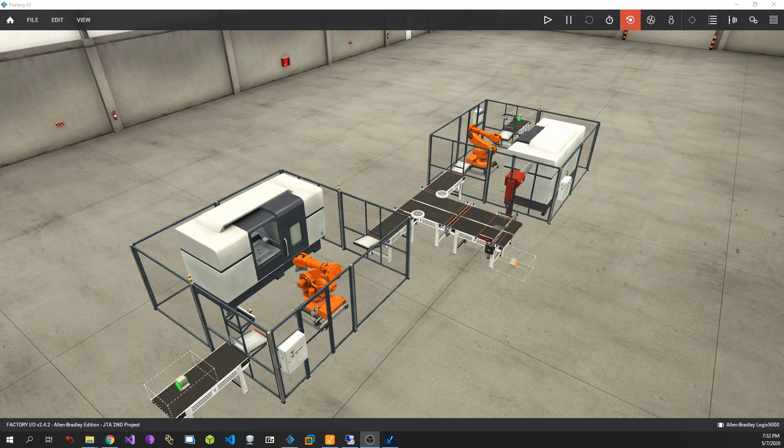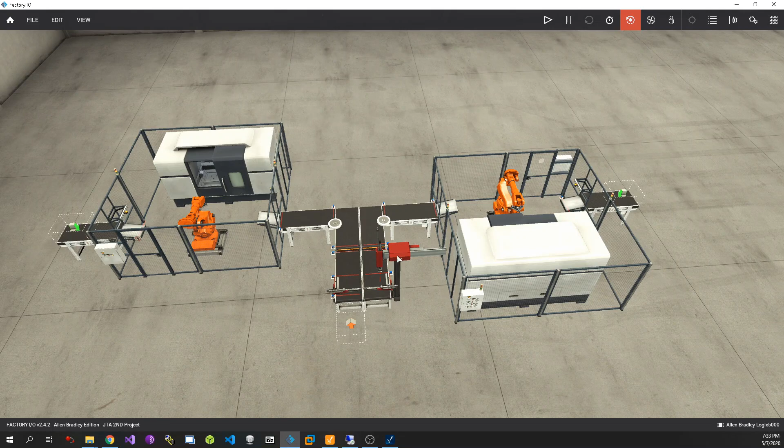I'm going to start off with the basic layout of my factory here. It's pretty simple. I've got a base machine and a lids machine station. Both of them are set up in relatively the same way. At each end there's a conveyor that feeds raw material into each one of the stations.

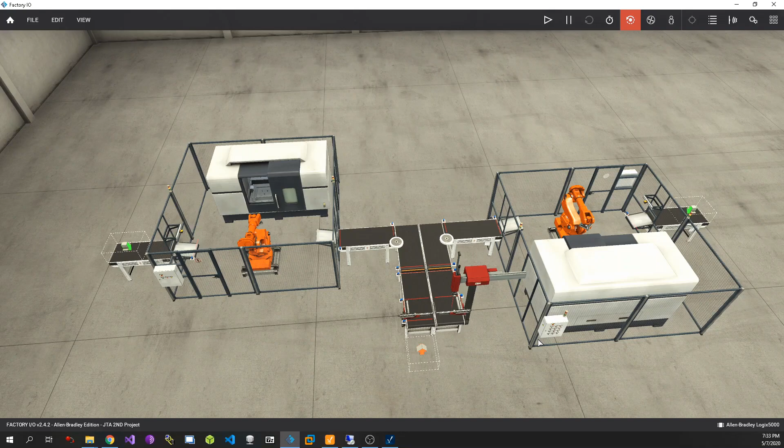It feeds in down the line, reaches these stop blades. Once both these stop blade sensors are met, it will feed into the assembler where the lids are conjoined to the bases and then off into non-existence.

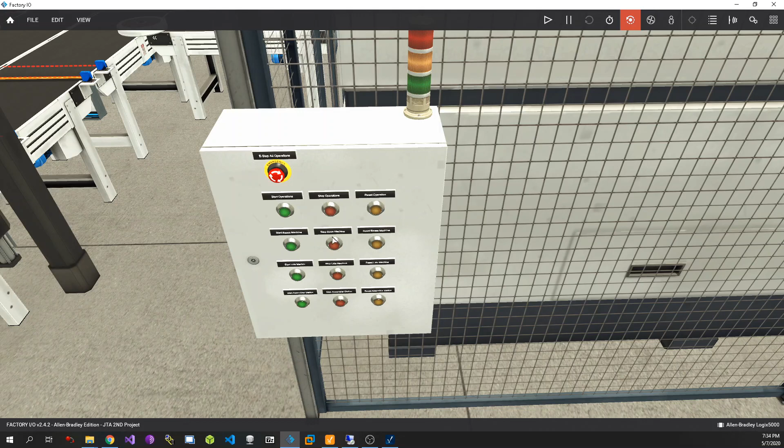Here is my main operations panel. The top one here is for starting or stopping all of the operations. Then down here for my base machine, my lids machine, and then the assembler. Right here is for letting me know if everything is ready, if it's stopped, or if there is an alarm present.

Here is my IO map. This is where I did a lot of my alarming, as well as my start-stop function and my heartbeat. Up top first here, of course, my heartbeat. Anytime that my heartbeat is not being read within a 5-second time parameter, it will trigger an alarm. I have this pseudo bit here to kind of make a pseudo communication failure.

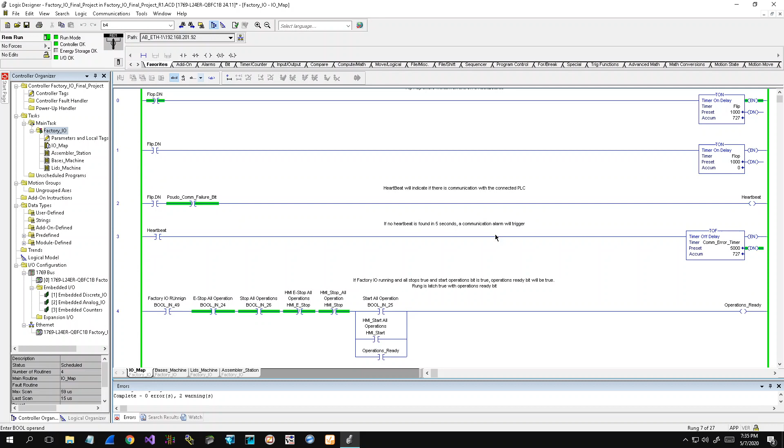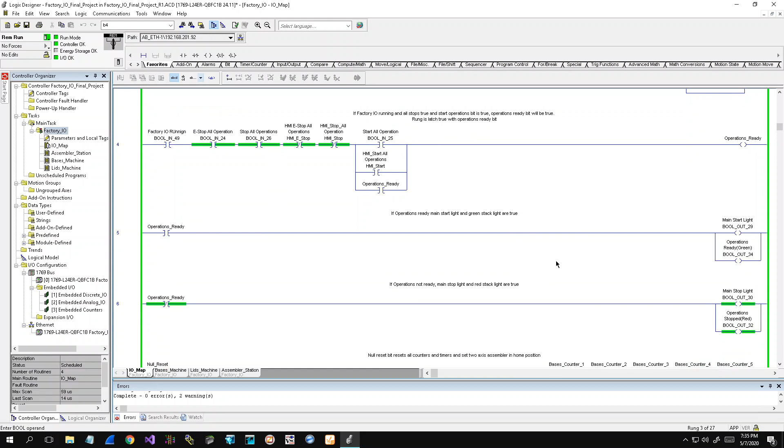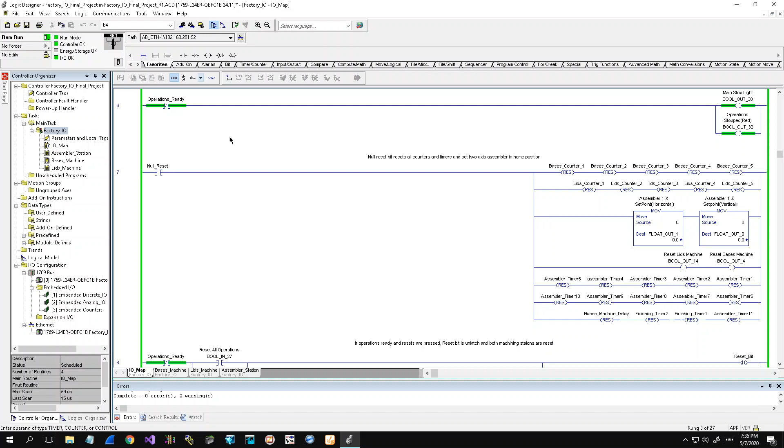And down here, this is for my start stop of my main operations buttons. Anytime the operation is ready, the main light is on. If not, the red light. This null reset here, this is for when I was programming and I didn't feel like starting FactoryIO over again and reconnecting and re-downloading my program. So I just set up all of these resets.

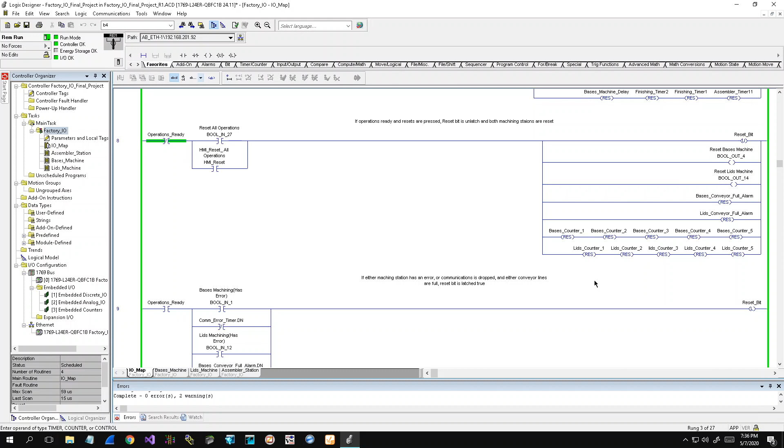This is my reset operation for if we have an alarm present. And then I can reset it here using this unlatch bit, and also resetting some of the timers and the counters that I have set up. These timers here are specifically meant for alarming. These counters are kind of for redundancy.

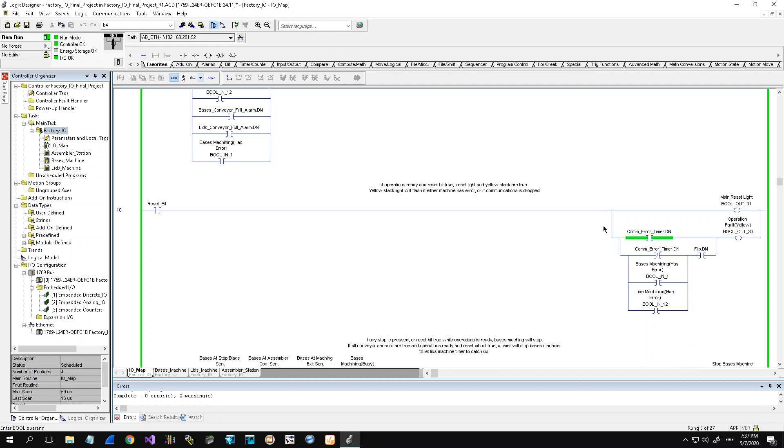And here is my actual alarming, where if base machine or lids machine has an error, or there's a comm failure, or any of the full alarms are tripped, it will latch in the reset bit. And if the reset bit is latched in, the main reset light will turn on. And if there's a comm error or any of the machines have errors, this yellow stack light will flash. If any of the conveyors are full, it'll stay on solid.

Down here is actually kind of a stopping protocol, I suppose, where if all of the base conveyor sensors are met, it'll stop the machine for a certain amount of time, which is 30 seconds here, and then it will restart it after that 30 seconds. That's kind of my catch-up protocol there, allowing the lids machine to catch up with the bases machine if all the conveyors are full.

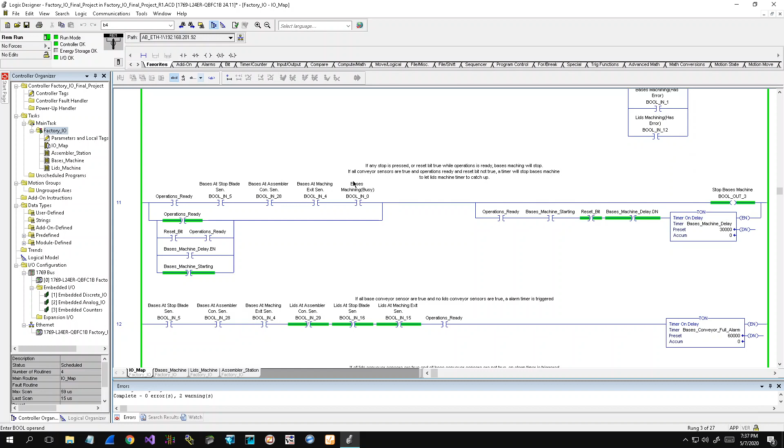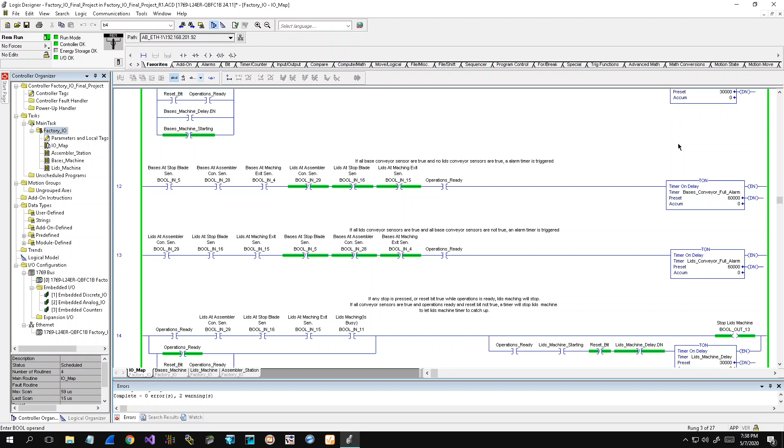If the conveyors are full on the base side and the lids conveyor has nothing going into it, then an alarm will trip, and that will be my base conveyor full alarm, and vice versa for the lids machine. And this is the alarming for the base conveyor and the lids conveyor full alarms, where if all these sensors are met and all the other sensors are not met while operation is running, it will trigger the alarm, and again vice versa for the lids.

And this is the same basic stop protocol as with the base machine. It's got a 30-second time delay in case the base machine needs time to catch up.

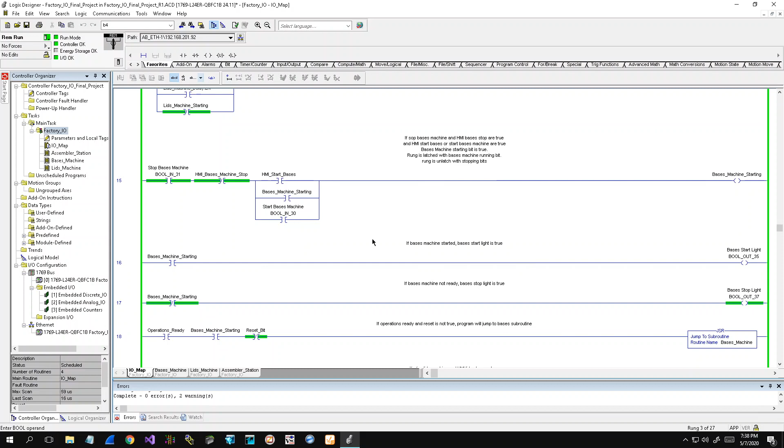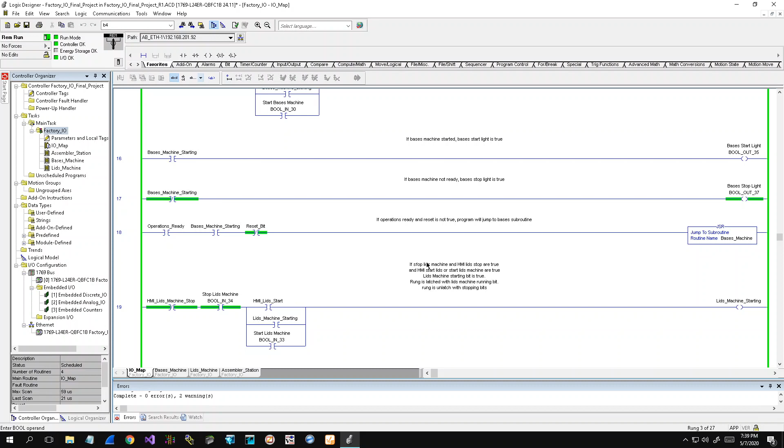And down here is my basic start-stop operation for the base machine. If the base machine is ready, base light will be on. If not, the stop light will be on. And if the base machine is ready and there are no alarms present, it'll jump to the base main logic. And this is also basically the same logic as with the other start operations.

Then once the lids machine is ready and there are no alarms, it'll also jump to its main routine. And the same goes for the assembler. Start, stop, if it's ready, light's green, if it's not, light's red, and then it'll jump to the assembler.

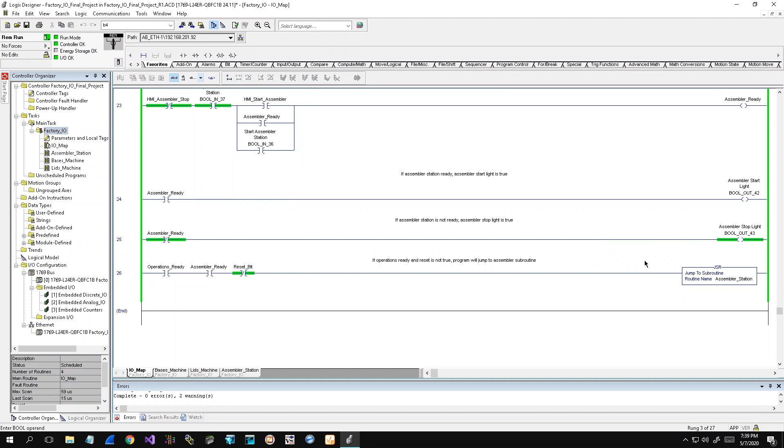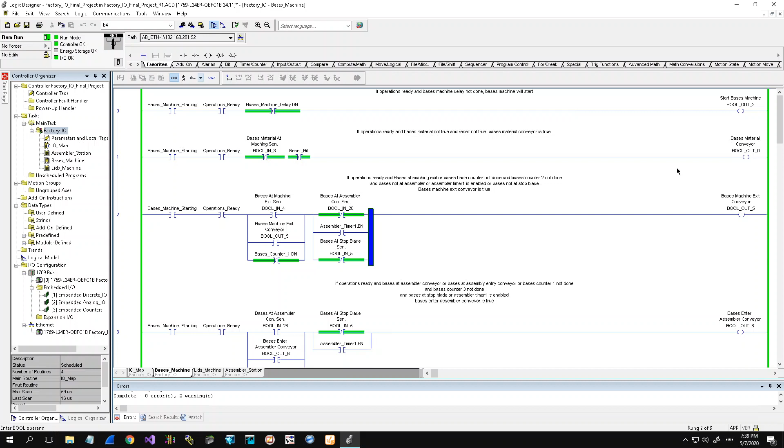And this is my main logic for my base machines. Base machine is ready and operations are ready, machine will start. If everything is ready and there's nothing met at the base material conveyor, the conveyor will start until that sensor is met.

How I have these next rungs set up is the base exit machine conveyor that's able to hold 2 products at a time, and it'll actually move one product from the exit conveyor onto the enter assembler conveyor, where at the enter assembler conveyor it'll wait until both the stop blade sensors are met, and then it'll flow into the actual assembly line.

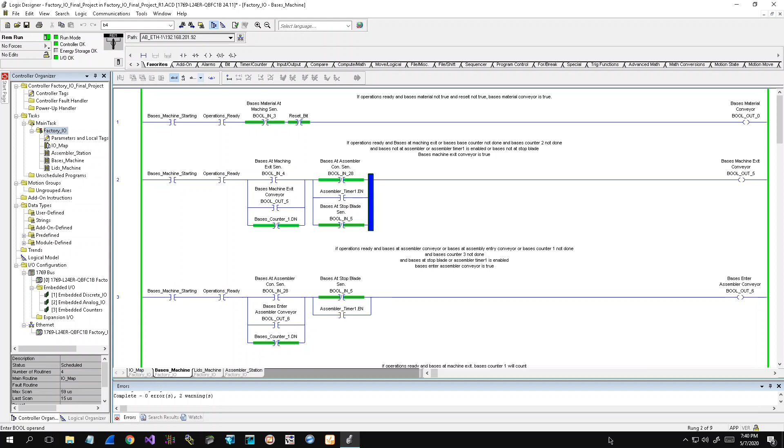And here are a lot of my counters. Originally I had them set up to turn on and off the conveyors. Now I'm using them as redundancy in case I have issues with FactoryIO turning things on when they shouldn't be, or keeping them on, or turning them off when they shouldn't have been turned off.

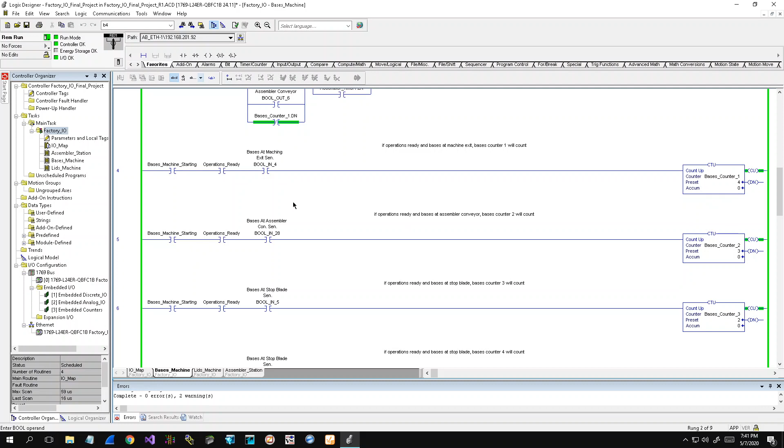And it's basically the same logic here with the lids machine. Again, the lids exit conveyor can hold up to 2. Once it holds 2, it'll stop running. The lids enter conveyor will only hold 1, and both the lids enter conveyor and the bases enter conveyor will start back up again if both the stop blade sensors are met and a timer is triggered, which that timer is this assembler timer 1.

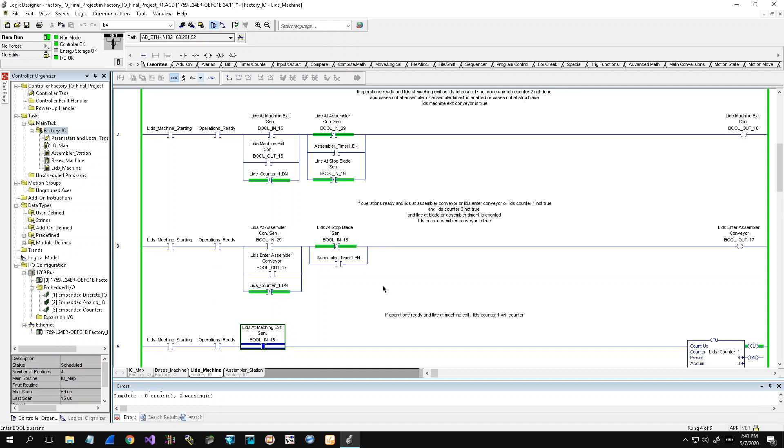And again, I have my counters down here, originally used for turning on and off conveyors and such, and now it's primarily just used for some redundancy. So here I have my main logic for my assembler. If both of the stop blade sensors are met, it'll trigger a timer here, which when the timer is enabled, it'll start those enter assembly conveyors back on. When it is not enabled, these stop blades will actually go down and let the product go onto the main assembly line.

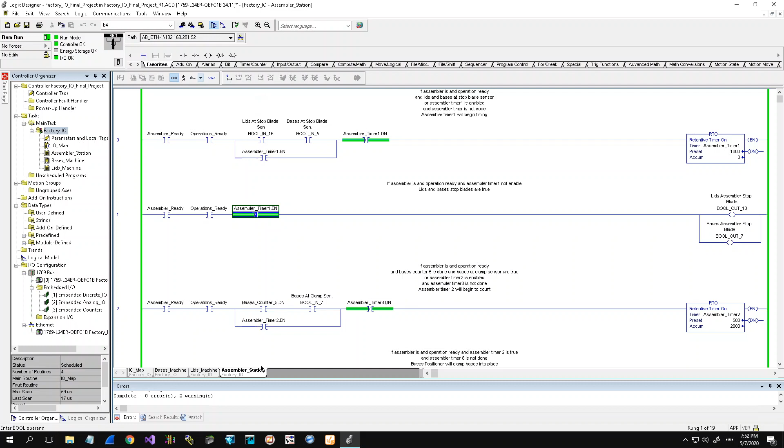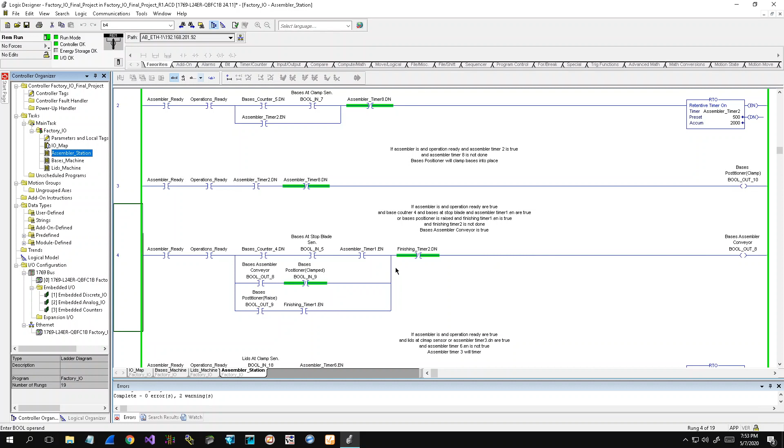And down a little bit further here, this rung will begin another timer if both these conditions are met. Base counter 5 is done and the clamp sensor is met, and that will actually initiate the clamping phase of the positioners. But the clamping can only be done after they've met the sensor and after a certain amount of time has been met, in this case half a second. It's giving the product enough time to actually meet the sensor and go down the conveyor enough to be clamped, where it's held in position and then later assembled.

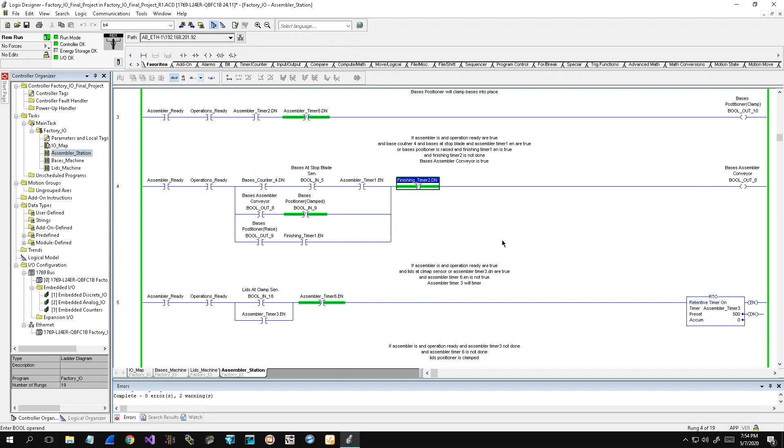This bit of rung here actually restarts the base assembler conveyor. This is actually where the finished product is, and these bits here will start the conveyor back up again and move the product down the line and removed. This logic here is for the lids. After the lid clamp sensor is met, it'll also give the lids enough time to reach the actual clamp to be clamped.

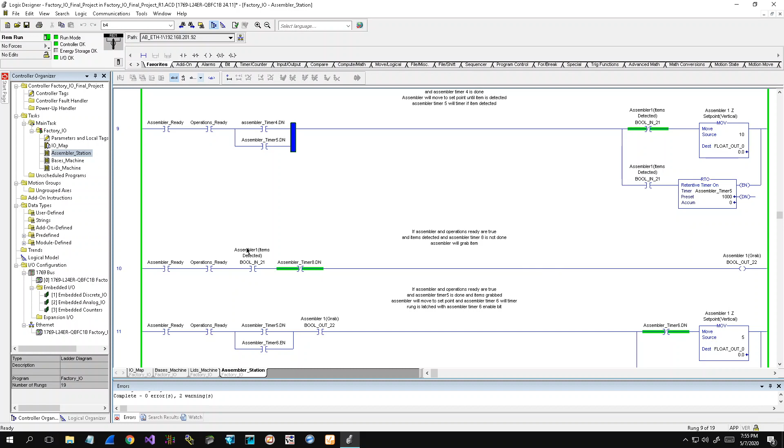And further down here, we have the actual assembly of the product, where when both of these positioners are clamped, another timer will get triggered, and it'll initiate the second phase, where the assembler will position itself over the lids, well, it's actually already positioned there, and it'll go down until the assembler detects the item. And once the item is detected, this timer will initiate and it'll start the grabbing phase.

And this timer here will actually initiate this rung here, as well as the done bit, or the grab bit, which will then move the assembler up just enough to make enough clearance to get over into the next conveyor line. And then this timer here is initiated, which will move the assembler over into the next conveyor to position itself over the bases, where this next timer initiates, and then it will move the product down onto the actual base. And this timer 8 here will actually disengage the grabbing phase, so it'll let go of the product so it doesn't bring it back up and throw it all over the place.

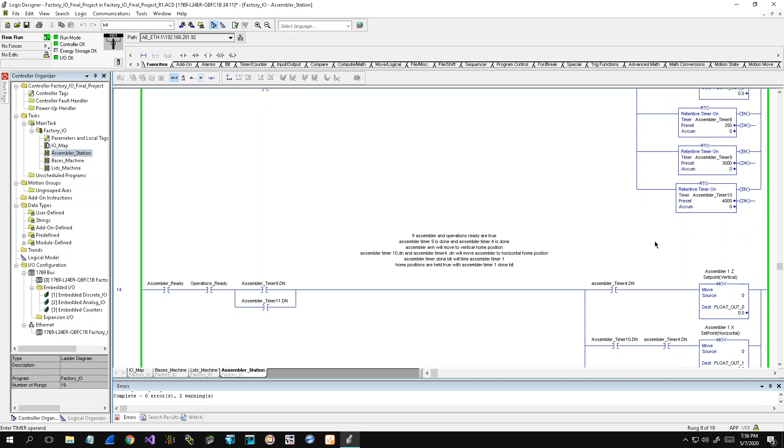And these two timers here will initiate the actual homing of the assembler. When this timer 9 is done, it will move the assembler back up into its vertical home position.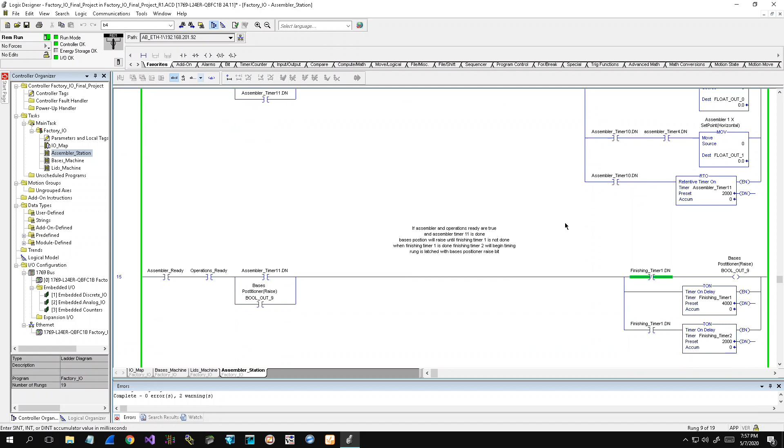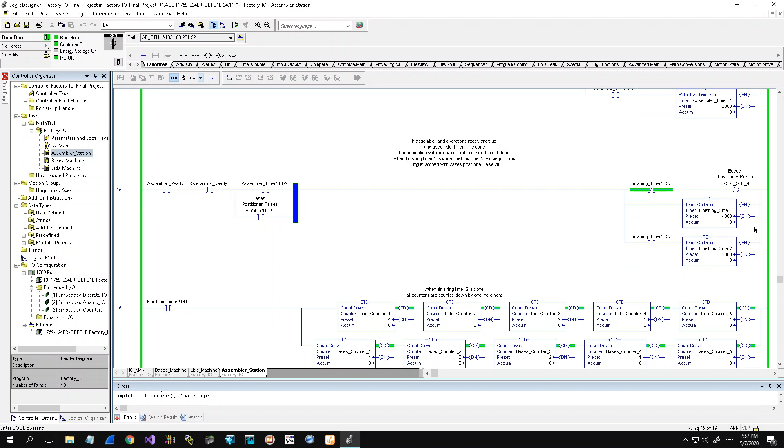When timer 10 is done, it'll move the arm back horizontally into its home position, completing the homing phase. When timer 10 is done, it'll start timer 11, where timer 11 will actually initiate some of the finishing phases, where it will raise the base positioner up, and then this will actually turn on the base's assembler conveyor with the finishing timer enable bit here, which will give it enough time to move the product out of the assembly line and into nothingness.

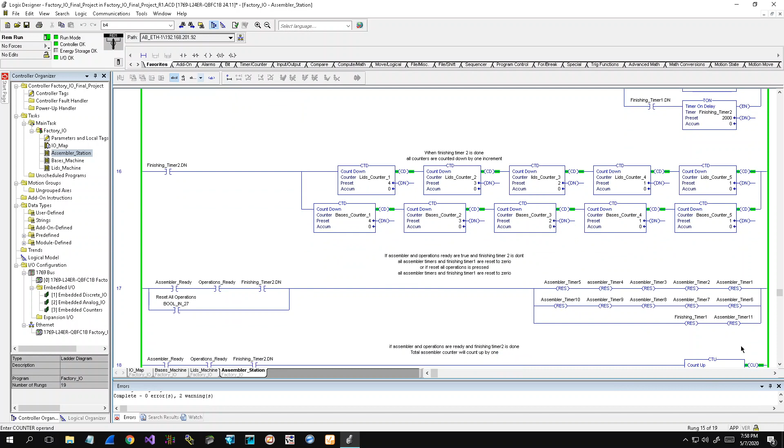This finishing timer is pretty much here for the sake of redundancy. It makes sure that these things are counting down properly. Sometimes the product wouldn't get conjoined properly, and the sensor would actually count too. So I put the timer there to count down the counters correctly, as well as to count up on the other count up. When everything is finished, it'll actually reset all of the timers, as well as the first finishing timer.

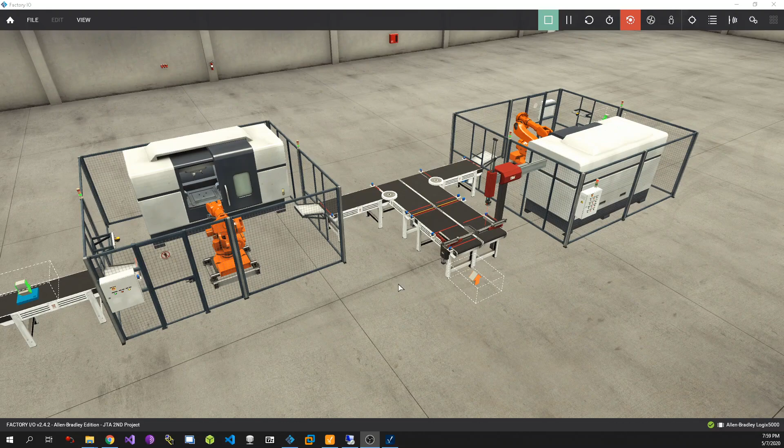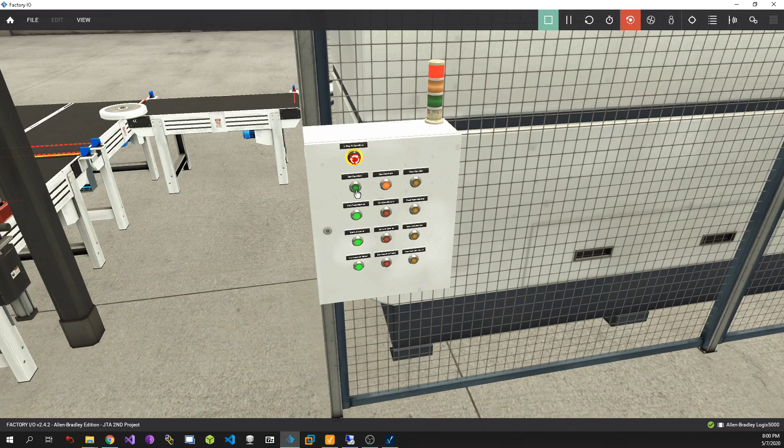With that, we can move on to the actual process of this whole factory. To get started, of course, we gotta start all the operations. You can start in any sort of way. I like to just get the machine started first, and then to start the actual operation itself, which will begin all of the phases. We got the material getting fed into the machines on both ends, which then gets machined into the actual CNC.

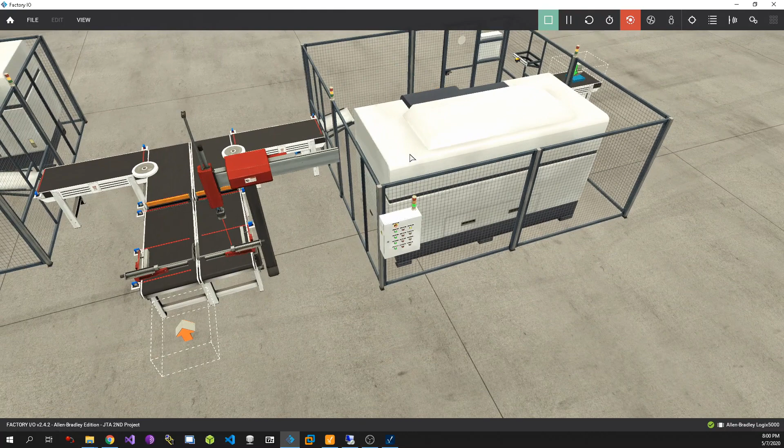Right now I'm going to show a COM failure, what that kind of looks like. And so once the COM failure has been initiated, everything stops. We got the base machine and this machine stopped. And as you can see, there's yellow over each one of the machining stations indicating that they're stopped. And then we've got the light here which indicates that there is, I suppose, a major fault.

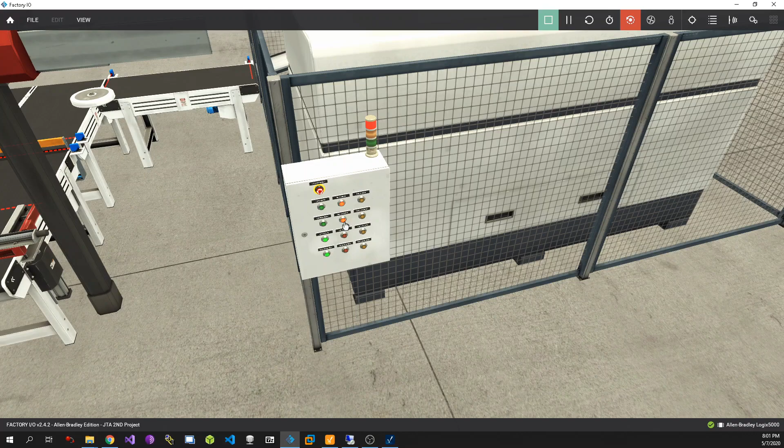In order to clear that out, we have to stop all of the operations. And then we have to reset all operations. And that'll start everything back up from the beginning. Now everything is back to the way it should be.

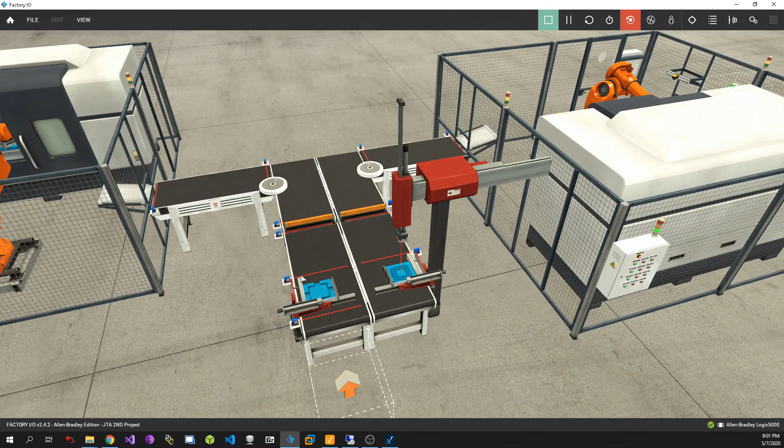And so now the lids are making their way to the stop blade sensors. And these are the clamp sensors. As you can see, they waited just a little bit before they actually clamped. And then they're actually getting assembled here. And this will raise, this conveyor turns back on, and then everything gets reset with that finishing timer.

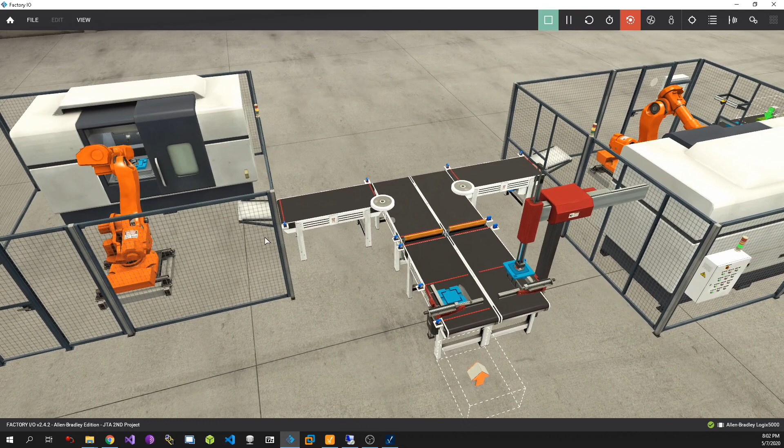Next, I will show a conveyor full alarm, which will actually take a bit considering how slow these take. So I will pause it and let one of these conveyors get filled up all the way. Now that one of the conveyors is almost full, it'll actually go into a stop phase where when these are full, this machine will actually stop because we don't want this thing to get overloaded for no reason.

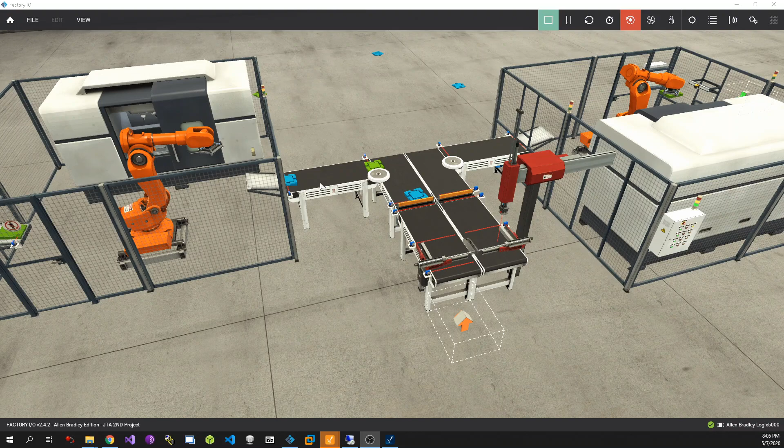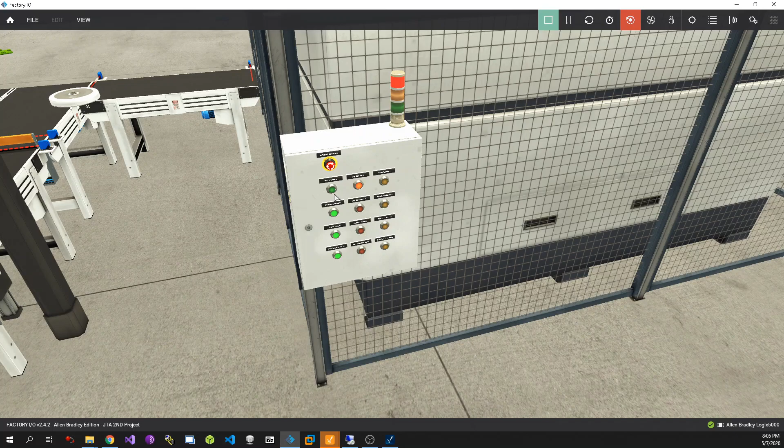So now that this conveyor is full all the way, I have another alarm present here. That's what this yellow indicates. It's not a major fault, that's why it's solid. So again, all we gotta do, shut everything off. Then we gotta reset it. And start over with this operation again. And there we go.

And since all these are still full, this machine isn't going to be doing anything, at least until this gets moved down here and there's enough room for some extra bases. I'll wait here a bit. And things are back the way they should be. And given that this is still stopped, it's actually got that 30 seconds it's got to wait yet, letting the lids machine catch up a little bit.

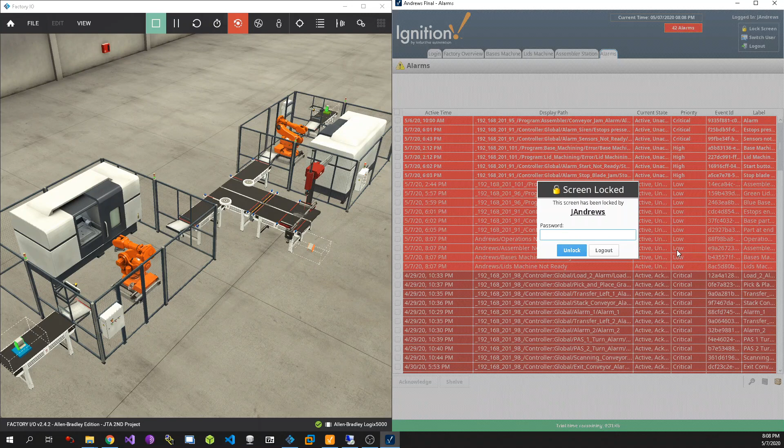So now that I've kind of demonstrated what it can do and some of the PLC alarms that it has, I can now show you the HMI and all the fun alarms that are set in that. So I have security set up in it where I am the administrator. I can do anything I want. I have two others, an operator and a guest. The operator can do anything that they want other than changing users and setting different alarms.

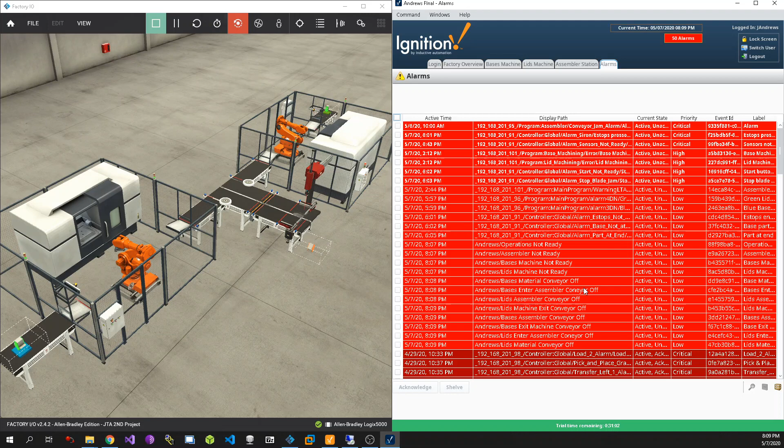So here are actually some of my alarms now. Operations aren't ready. None of the assemblers are ready. All the conveyors are off. And those are all active right now because there's nothing that is on. Go down a little bit further. There's some of the old errors, communication and all that. And it'll actually tell you if a reset is required.

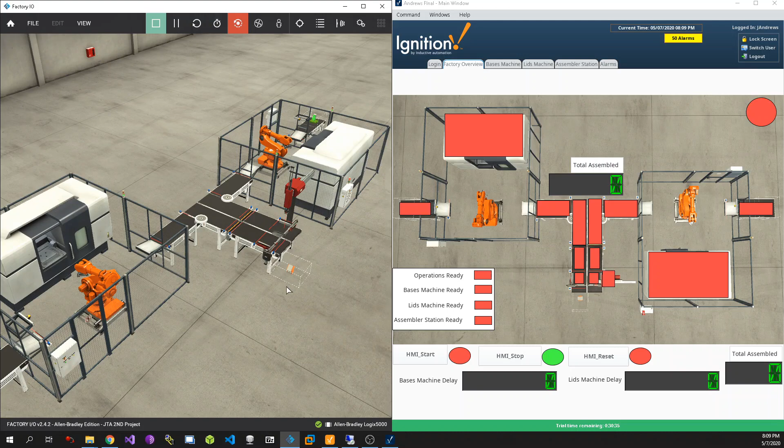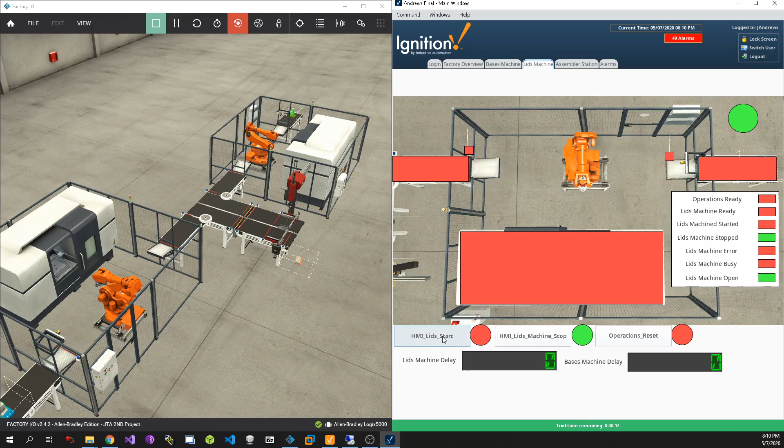So here is the factory overview of, well, of the factory. Here I got my start and my stop, my reset, and here's for the bases and the lids and the assembler station as well. So just like with the main panel, I like to start off with just starting all of the lids and base machines first. So now all of those things are ready. We can start the final operation. And there we go.

So these ones indicate that the conveyors are on and that the base and lids machine are ready, as well as the assembler here. The circle here is my heartbeat. If that goes away for too long, another alarm will trigger. So I will do that pseudo alarm trigger again, and we will see that alarm event in the HMI.

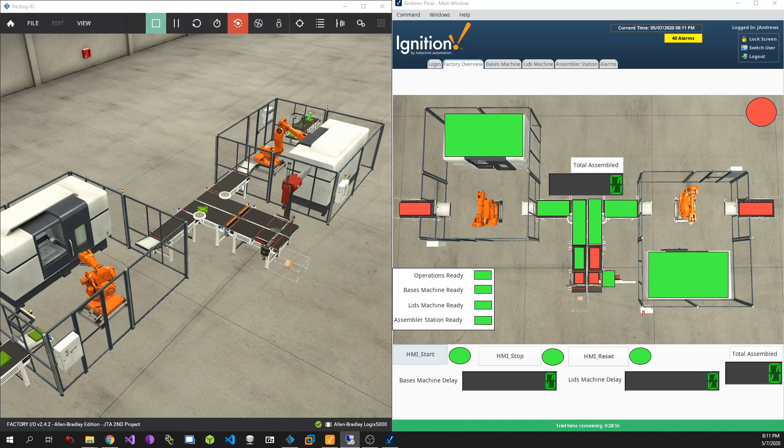Give it 5 seconds and stop. Machines have stopped. Though the conveyor should be off. That's just some weird Factory I/O thing. It just doesn't want to do anything. So as you can see, my heartbeat is gone. And so again, we gotta shut all of these machines off. And I actually use toggle buttons for these. So you actually gotta turn the start back off.

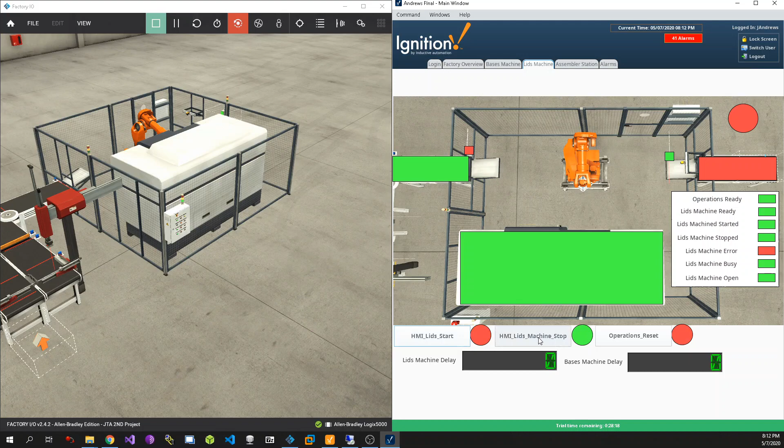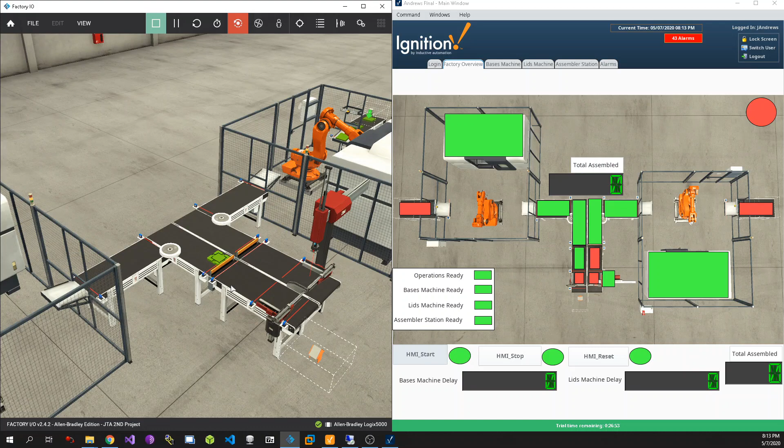And so with all the machines off, we can now reset it. Whoops, I'd have to turn that off. Yeah, so now we just reset it. And now we can go back in and turn everything back on. Base is on. And now we will start the operations over again. Well, we can't because the alarm is still present. So the alarm was still present because I forgot to turn my pseudo failure bit back on.

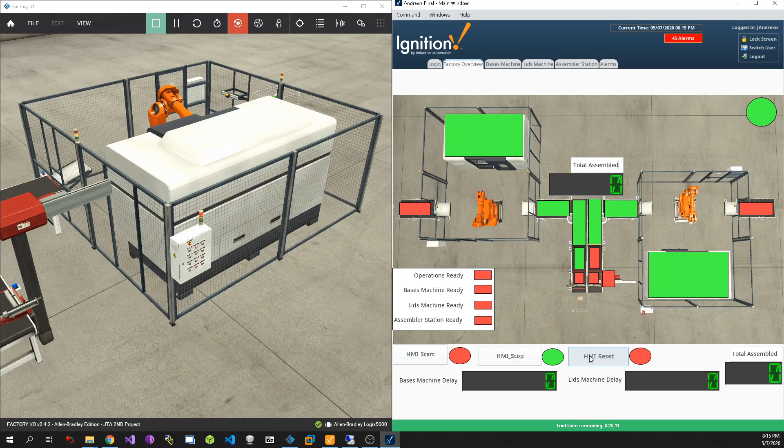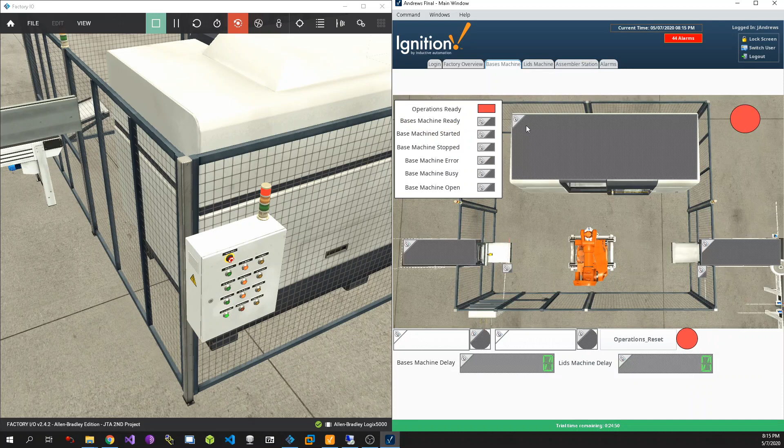So anyways, the HMI toggled the reset. You can see everything is off. The reset button's not on. Red light is on. Everything's off. Yellow light's off, so there is no alarm. Now we can go back, start up everything. Just look at that. Bases, the lids, now the overall factory. Everything starts back up from where it left off.

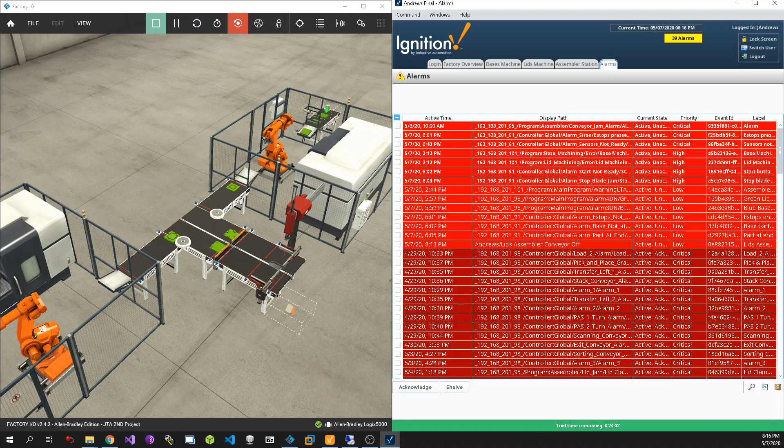Now we can go check out that alarm that used to be there. There it is, 807 communication error. And then here are the other alarms for system reset required, communication failure, and the assembler conveyor is off because that's kind of what we wanted. And so that pretty much does it for the actual project.

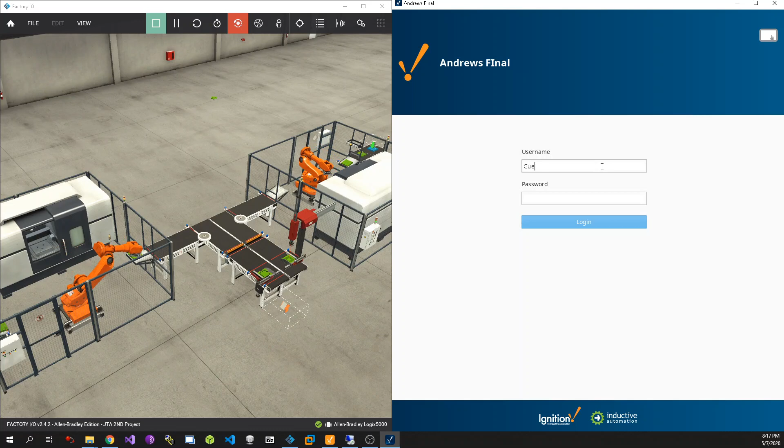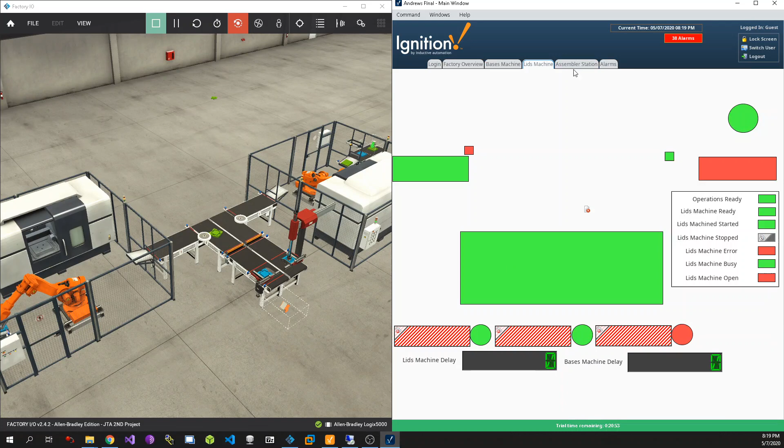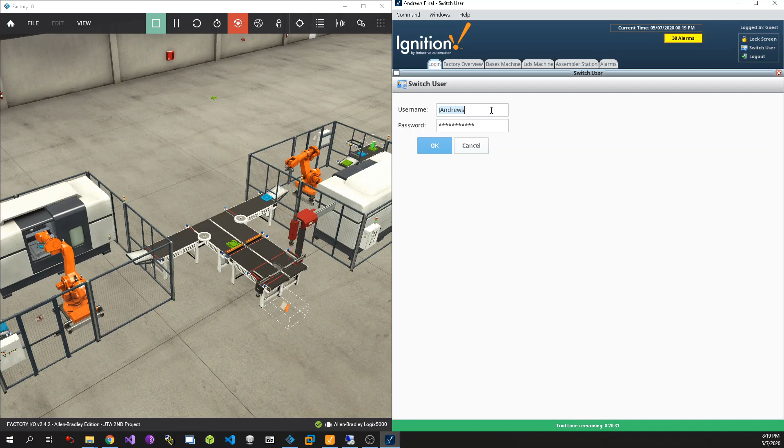Or I suppose I forgot to mention that I do have the security set up, like I said before, with the guest and operator and such. So we will log into the guest account. And so the guest can look at everything, but they won't be able to access things like the alarms or the push buttons. So you can see all of the push buttons to start, stop, and reset are disabled, and you can't get to the actual alarms screen at all. That is given to the administrator, but you can log out or log back into a different user. I'll do operator.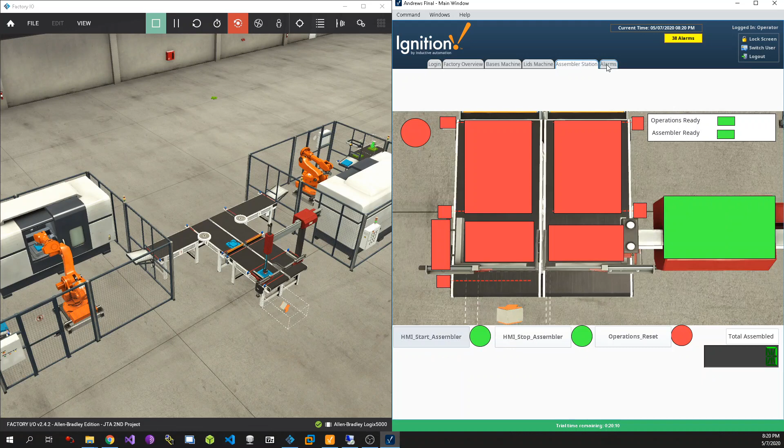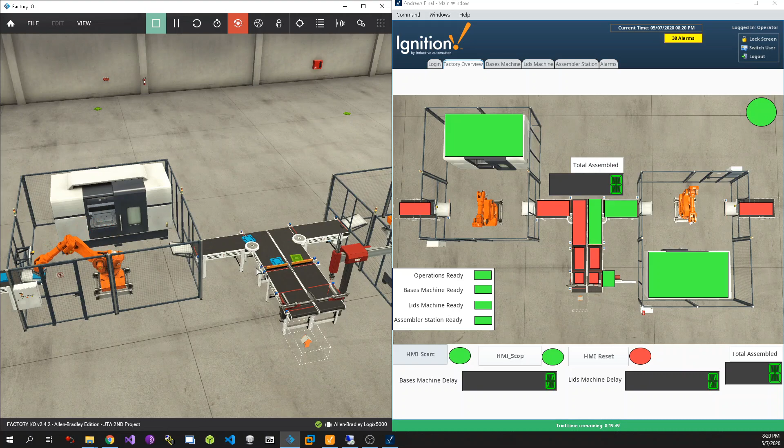Well, the operator can pretty much do a whole lot of the same stuff the administrator can. And that's pretty much what I got for you. Some of the things that I would have liked to have done a little bit differently with this is probably make a prettier looking HMI, maybe some better alarming. But I would have also liked to have set up maybe some additional machining stations, considering these are super slow and just kind of a real drag watching it.

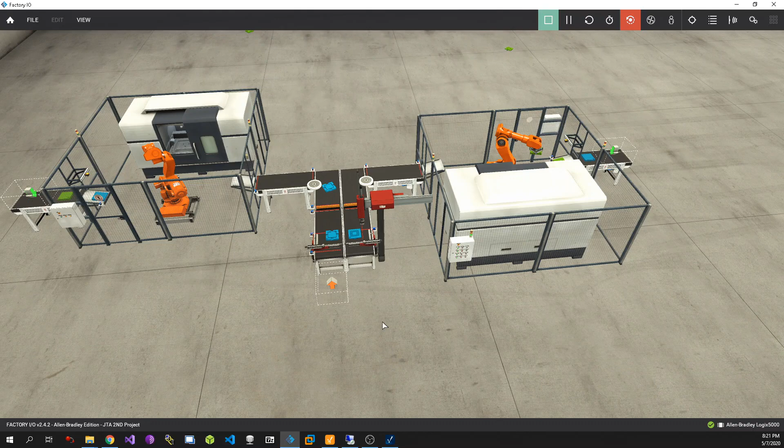But also a sorting station to separate the different color material that goes into each one of these stations here, as well as a palletizer to put everything in boxes and to put it on pallets, and of course to move that to their own separate sorting station, and probably some more alarming as well. I couldn't exactly think of too much other than full conveyors and the pseudo COM error. So that pretty much does it for this actual presentation.